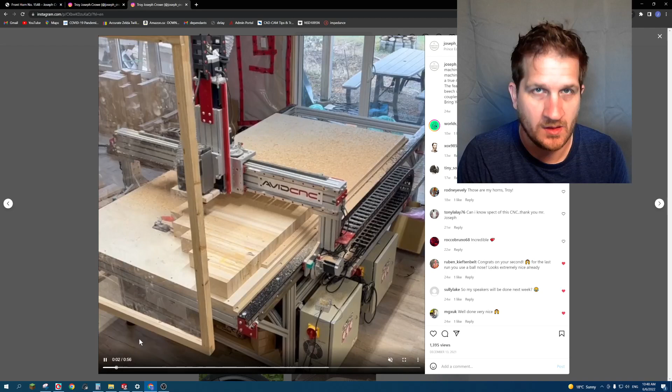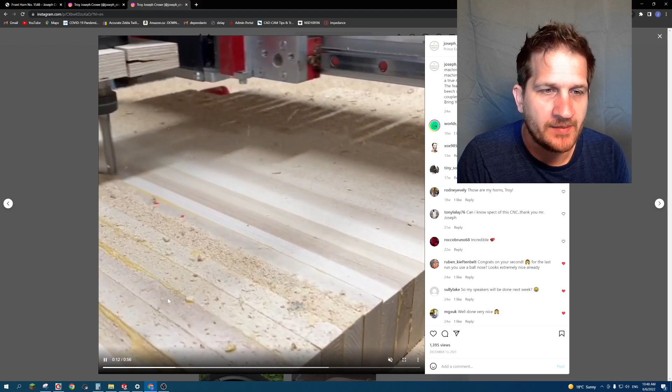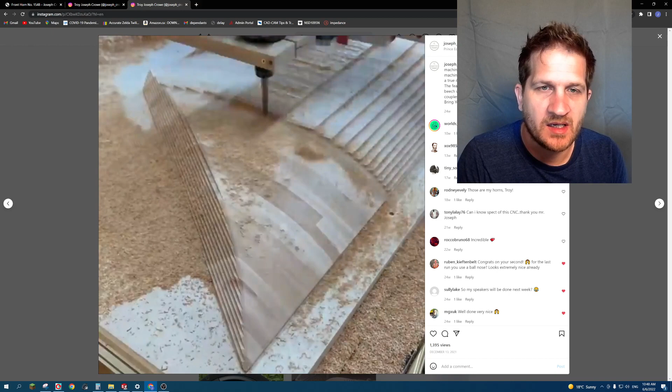In this video, I wanted to just kind of show off a recent project that I had completed. Actually, I completed it a few months ago. It's a large front horn for an 8-inch full-range driver, and took advantage of having my second CNC commissioned about 8 months ago, and I'm now able to make much larger horns.

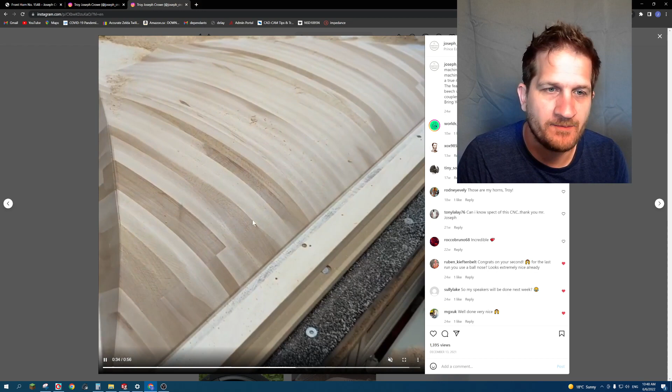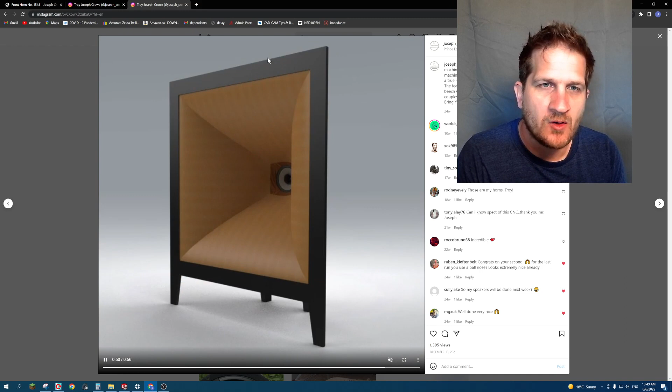And so I'm just playing this video back, this is from my Instagram, to show how the horn was actually constructed. So the horn is comprised of 4 petals from beech hardwood, and the 4 petals were bolted together. And the overall appearance of the horn is based on a design that's from Rullit.

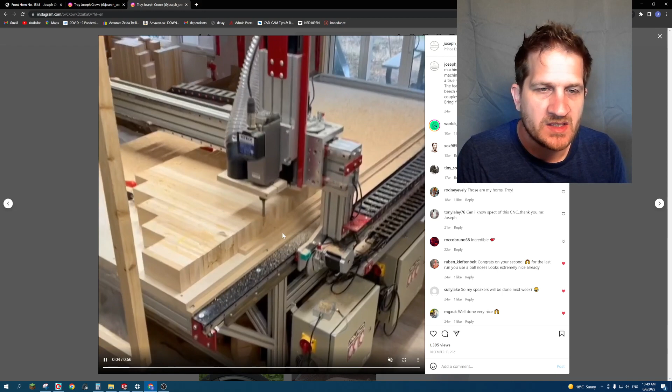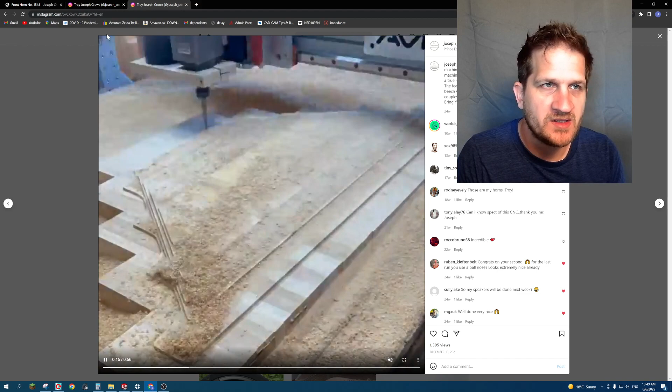The customer had commissioned me to design and build a horn that was inspired by the Rullit design, and so I took liberty to improve a few things. So what I wanted to do is just kind of show you how this horn was made. You can see here it was made on the CNC with each petal laying flat, and then it was rough machined and then finish machined with the ball nose cutter there. You can see the time lapse.

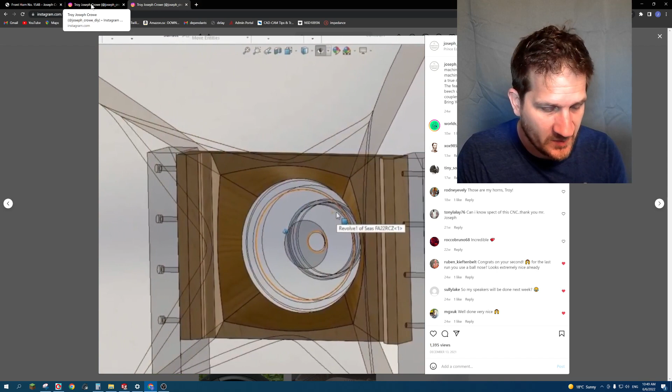And so the horn ended up being quite heavy, and it was much harder to handle and to move around than I had anticipated, but we managed to get through it. And so this is the end result. To really get a sense of the scale, I took a photo of myself in front of the horn. You can see there, this is a very big horn.

Another change that I made to the design was to do this throat adapter piece that transitions the circle shape of the driver to the square throat of the horn. This was also CNC machined out of walnut. You can see the walnut piece was integrated very tightly into the rest of the horn, using the 3D CAD modeling to get that to work.

So the driver that I had on hand for testing was the AER BD3. Actually, just let me pause this here for a second. I'm going to turn off my mic. There's an audio clip that I wanted you to hear of the horn playing with the AER BD3-B full range driver.

Very lonely, lives in a duplex of stucco. On the north bank of a brackish river.

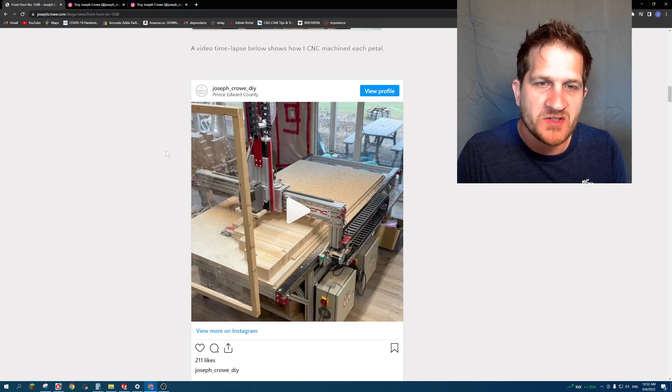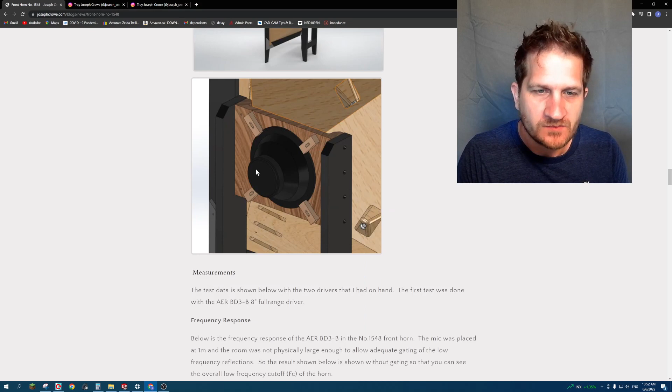Okay, so looking at the test data, this is the resulting frequency response with the AER BD3, and you can tell that it's extremely ragged, and this is more attributable to the reflections in the room. This is not a gated response, and so it's just giving you an idea of what the horn is doing.

Unfortunately, I didn't provide a comparison against the driver out of the horn in a regular enclosure, but we do see once the response is smoothed, the horn is providing good solid output down to around 150 hertz, where it tapers off, where the horn loading doesn't provide any gain below 150 hertz.

And so burst decay, these aren't good results. I understand that, but it's more of an interest. I did do distortion on the AER, and there was actually quite a lot of distortion, especially through the 500 hertz region. Only 35 dB down. Increasing the level, things just got significantly worse. So at 95 dB, we're at 5.6% distortion.

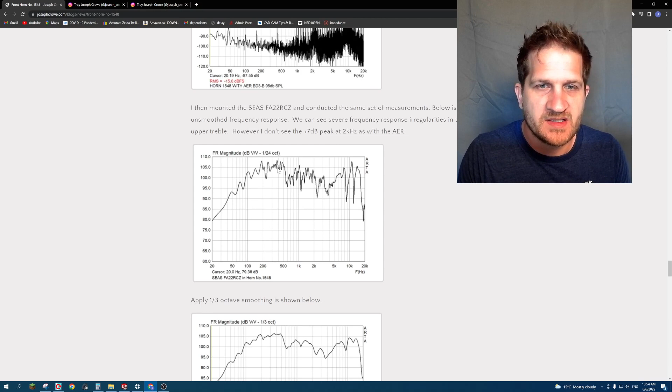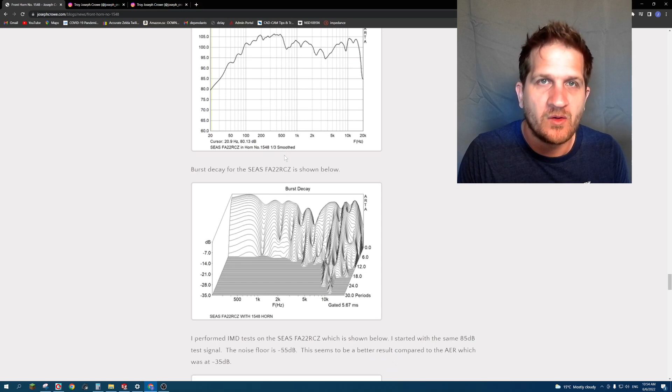So now I had another 8-inch full range driver on hand that I decided to swap in, and that was the SEAS FA22RCZ, which is a really nice full range driver. And so I conducted the same distortion tests, and you can see here that it's doing quite well. This is the response with the SEAS driver, and it's got a kind of a downward trend. It's providing a lot of increase through the mid-bass region, the horn contributing there. Burst decay looks better than the AER.

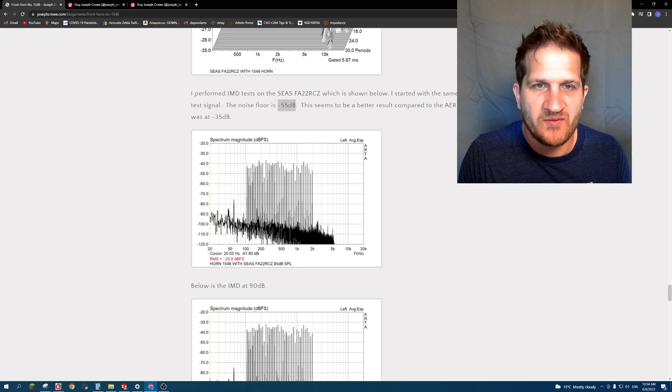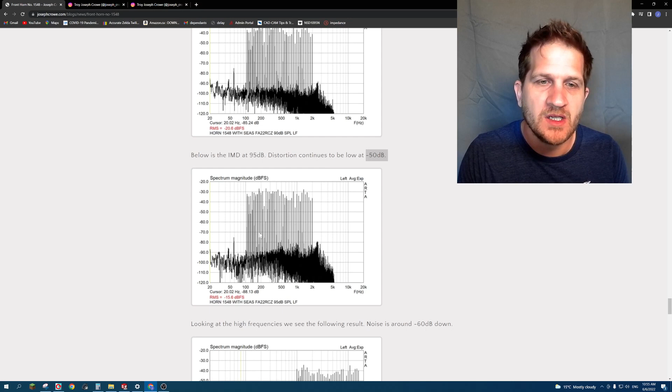Sorry, I just want to clarify. These measurements up here were still with the AER, and so 52 dB down, 50 dB down at 95, and so these are, I would say, average results. When we get to the SEAS, you can see that we're on 55 dB down, and then as we increase the SPL, distortion remains low. 95 dB SPL, we're 50 dB down. Okay, and so much more respectable results with the SEAS driver.

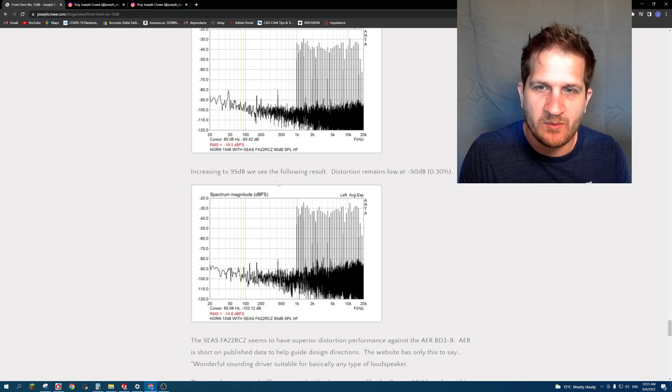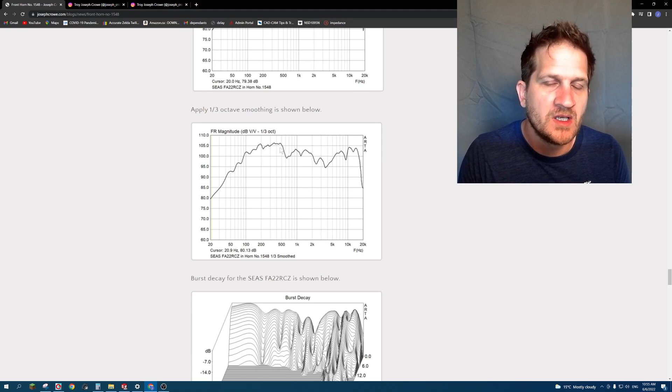And then things get even better when we switch to the multi-tone test in the high frequencies. You can see that it's 60 dB and remains at 50 dB. It's only 0.3% distortion at 95 dB SPL output. Okay, so the SEAS performed quite a bit better in terms of distortion. However, because of the high QTS on this driver, you can see that there's a lot of mid-bass bloom, and subjectively that's what I encountered when listening to this driver. It seemed like it had a cleaner sound, although the overall balance between the bass, mid-range, and treble was just too mid-bass dominant.

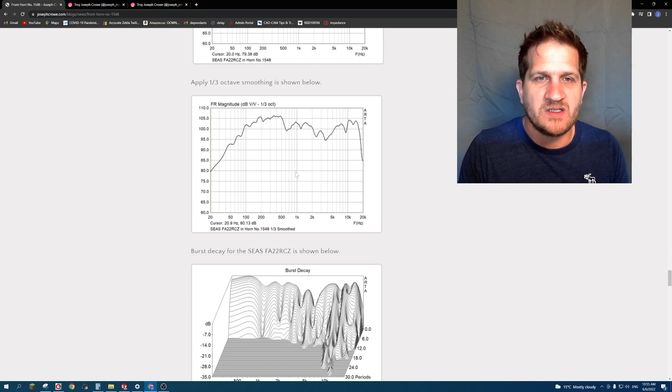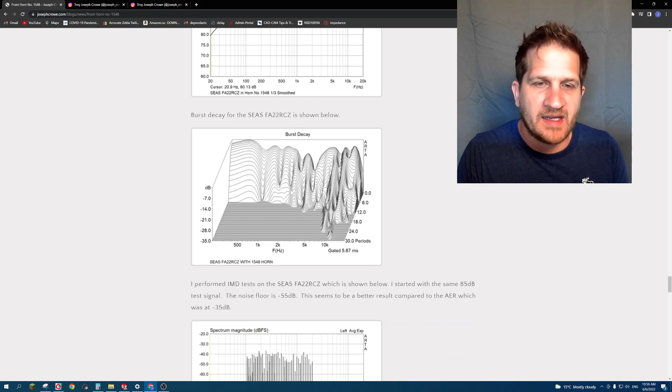And so really, when it comes down to it with this type of a horn, you want to get a driver that has a QTS of 0.3 or lower, and ideally you'd want something around 0.2. Okay, and so that's the beauty of some of the field coil drivers, is that you can vary the QTS of the driver to accommodate the type of horn that you have the driver mounted in.

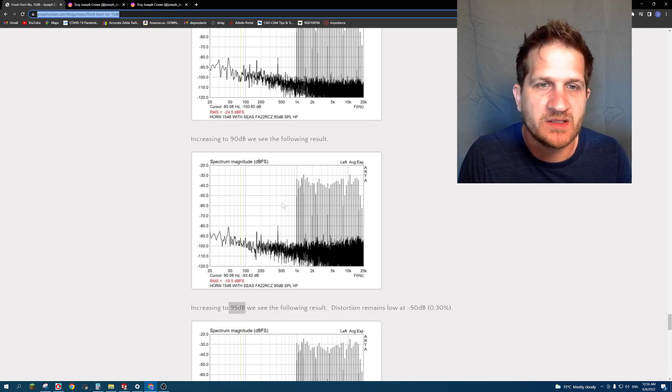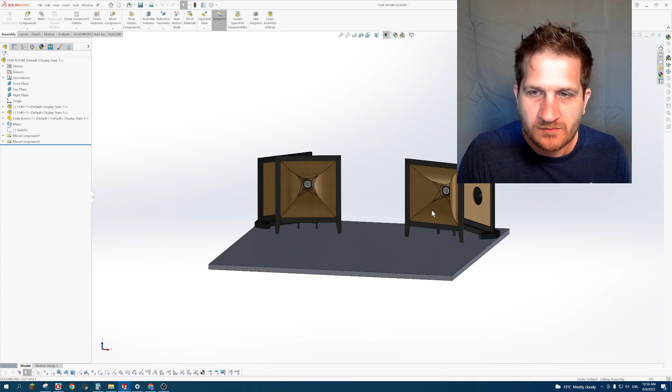The customer is using a Kaizen Japan custom-made 8-inch field coil full range driver, and I've yet to do any testing on that driver since the customer just received them. So because it only goes down to 150 hertz, I can show you what the customer ultimately is doing with his system, and you can see here that the customer is doing open baffle 15-inch woofers in conjunction with the front horn. Okay, and so I did build the open baffles as well recently, and the customer has those, which I can look at in a future video.